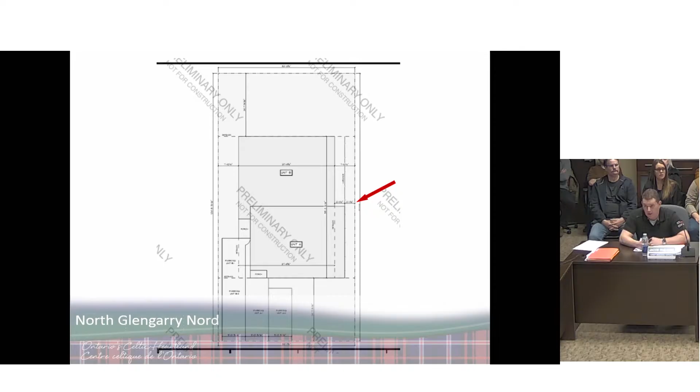So in this case, there's 3 parkings for 2 units, so it's compliant with both our current and our future dwelling unit future zoning bylaw that will be passed this year.

So that's the property. That's an image of the property. The phone pole that you have there is pretty much where the property line is. So the reduction for the setbacks is where that red arrow is again.

There's currently no buildings on the north side, so the property goes from Marlborough to Robert. I did get a phone call from the owner of that property, and I explained that even though we're asking for this reduction here to 1.2 meters, it would not affect her property either for planning or for building, in the sense that 1.2 meters is still not too close to the property line to affect another building on another property, like for fireproofing, siding, etc.

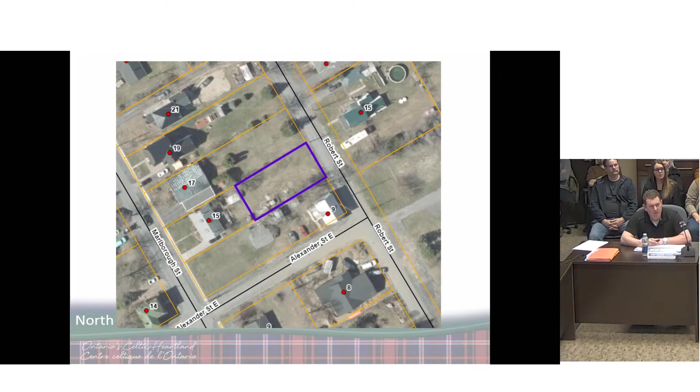It would also not affect her if she would decide to split the property in half to create a new lot on Robert Street—she could still do that even though this reduction exists here. So it doesn't affect her property as well. She was happy with the comments of the discussion.

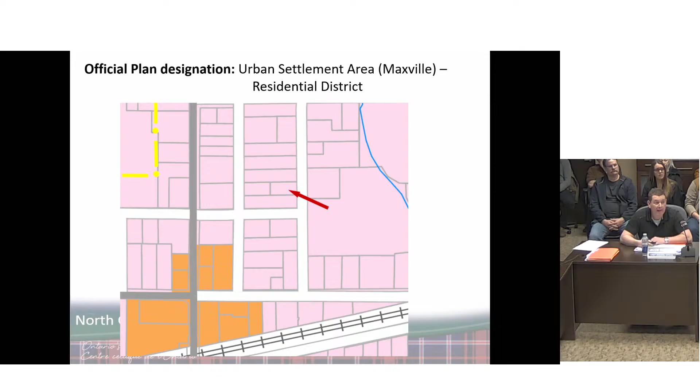So that's the picture of what it looks like now, currently vacant. That's my little map for the urban settlement area of Maxville. As you can see, it's pretty much surrounded by residential properties. Same thing for our zoning—north, west, and south you have residential properties, mostly single-family dwellings.

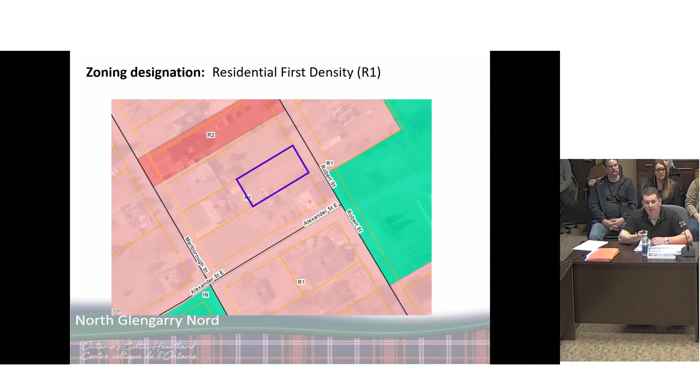Just in front, it's still in green there, so currently it's zoned R4. This is where you have the apartment complex, James Rowland, the old St. Bernard School, so it's pretty much right across from that.

So the setbacks, as I mentioned, one side has the required 2.4, so the owner kind of maximized the width of the building—he kept 8 feet on one side to be able to access the backyard, and on the north side there's that 1.2 meter instead of 2.4 that's required. So parking is compliant in this case.

If I keep going, for water and sewer—there is access to water and sewer on Robert Street, so this new building will be connected to municipal services. That's not a problem.

Stormwater, grading, green space—in this case, not a problem at all. There's enough space at the back for green space to divert the water, so that's not an issue.

There's one proposed driveway that will be wider than usual for the 3 parkings, to accommodate the 3 wide parking. And in this case, I explained why the 2 units are permitted—we do not have to do an actual zoning bylaw amendment to R2, even though it's R1. They're permitted to do the 2 units even though it's R1, but because of the way our zoning bylaw is written, we apply the R2 setbacks.

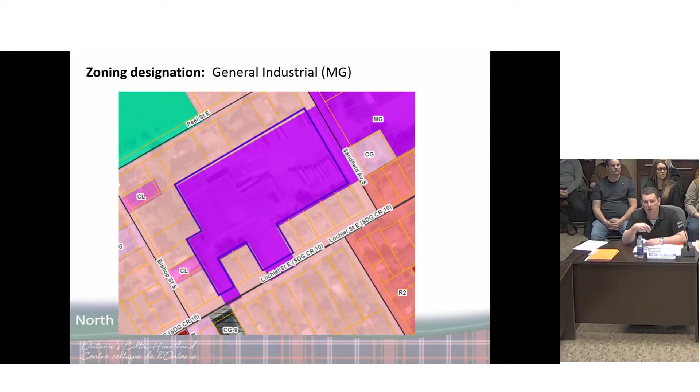Official plan designation: urban settlement area for Alexandria, employment district. So the proposed use or addition does fit with the official plan designation. General zoning designation is general industrial, so also compliant with the proposed use. Right now it's used as a warehouse shipping business, Minimax. That's to remain, so it's really just an addition for that existing use, fully compliant with our zone. On that picture there was no variance requested back in the day, but the lot coverage in this case is a little too much because of that big shelter. What we're proposing now is within the lot coverage of the general industrial requirement, so it's actually compliant with everything else aside from that setback.

So it's a new addition we're proposing, 56 meters by 28 meters, located on the east side of the existing building. I'll show some pictures, it will be easier to understand.

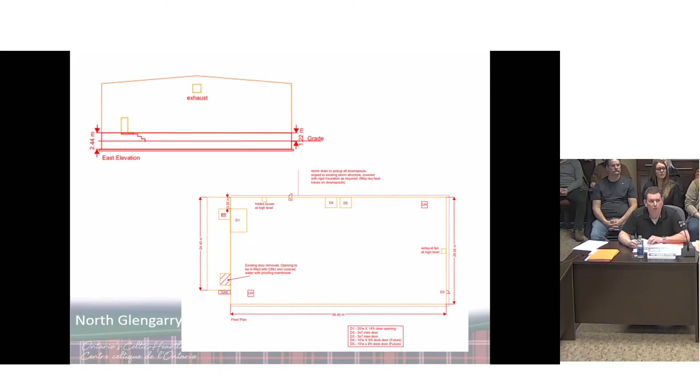Grading, swales, stormwater in this case all existing. We had that previous big building as it was, so all the water was collected on a private storm running pretty much across where those tractor trailers end. There's a few manholes there. This is all existing, we're going to use the same stormwater and grading system.

So we're still with our site plan control bylaw that we have. I'm still trying to see if we need one because it was existing. I'm discussing with Peter Young to see if we need a site plan in this case because everything was existing before, so we're really just reinstating what was there. Like most of the time, grading and stormwater are the biggest issues, and in this case it's all existing. So anyway, we'll evaluate what's being done at the planning stage, but that's what's proposed right now.

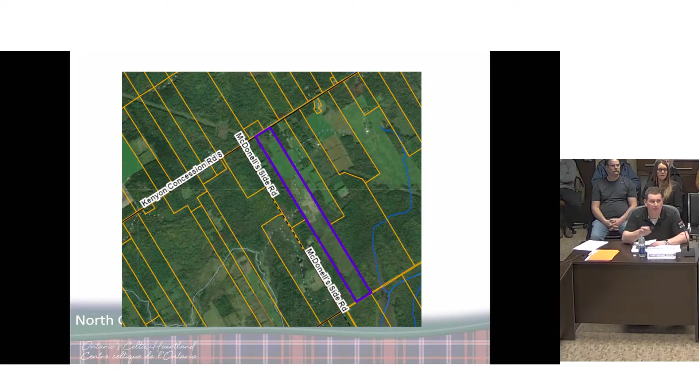Ferme LCM Kenel, the address 19442 Kenyon Concession Road 8. So that's where it is, pretty much between Dunvegan and Greenfield on Kenyon Concession Road 8, right there, a little closer up. Next door is the typical surplus dwelling - that's why you see a big farmland just east of McDonell's Side Road. The purple lot you see there is the agricultural land that is severed off from the residential lot we're severing off as the surplus dwelling.

So the owner is selling the house and keeping the land for farm use. The purpose of the application is to rezone the retained portion, the large 101 acre portion, from general agricultural to general ag special exception 275, to prohibit residential development and to acknowledge the deficiency lot frontage from the required 200 meters to the proposed 139 meters, and to rezone the severed portion, the residential lot.

That 1.5 acre severed portion goes from general ag to general ag special exception 276 to prohibit agricultural uses. This is just to comply with conditions from the consent application B68-25 that was already passed by the SDG Planning Committee, which required that we rezone those two portions. So that's the severed portion, that's the retained portion. Both have frontage on Kenyon Concession Road 8.

Official plan designation is agricultural resource lands and rural districts. Because the residential lot is located in the agricultural resource lands, we have to consider the entire property as ag. So we're changing the entire property zoning because the rural lands at the back don't have frontage on a public roadway at this point. Zoning designation is general agricultural, so our zoning bylaw is simply general ag all the way across.

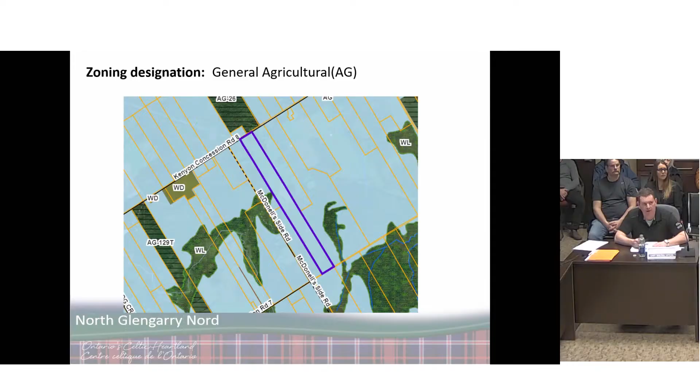I'll show it on the picture. There it is. As you can see, just on the east there's an entrance to access the agricultural lands at the back. No other entrances are being added. Just to note, there's our old landfill right there where the A is, not affecting the severance at all. If something would ever happen to the house, the setback from the landfill is far enough that it doesn't affect any development.

So it's really just a typical surplus dwelling severance. Very quickly, the Planning Act gives council the authority to pass such bylaws. Under the PPS and the SDG official plan, as long as the severed portion, the residential portion, is kept to a minimum acreage to accommodate the dwelling, septic system, and accessory uses, that's okay. In this case, 1.5 acres, a nice rectangular lot on the road, so it makes sense.

The septic system, we took into consideration where it is, on the south side of the building, and the well also, so all the setbacks are compliant. We did get the survey for that one, and there are no issues with the new property lines whatsoever.

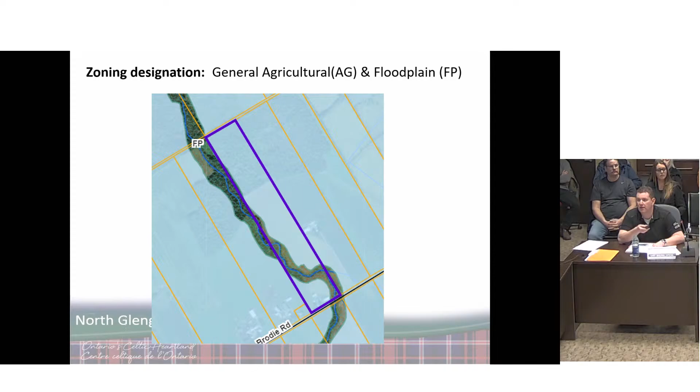For discussion: it's a 50-acre property, with 1 acre being cleared off for the residential land. Regarding frontage, both lots have frontage on Brodie Road — 110 meters for the agricultural portion, which is about half of the 200 meters required, but still permitted as a surplus dwelling. The residential lot, also on Brodie Road, has 75 meters, which is more than the 45 meters required and compliant with the zoning bylaw.

As shown on the map, there are 5 buildings on the property. Three are being kept with the residential lot: 1 dwelling and 2 accessory storage buildings. The septic system is located southwest of the dwelling, and the well will also stay on the residential portion. The 2 agricultural storage buildings will remain on the agricultural land, so no change of use is required here.

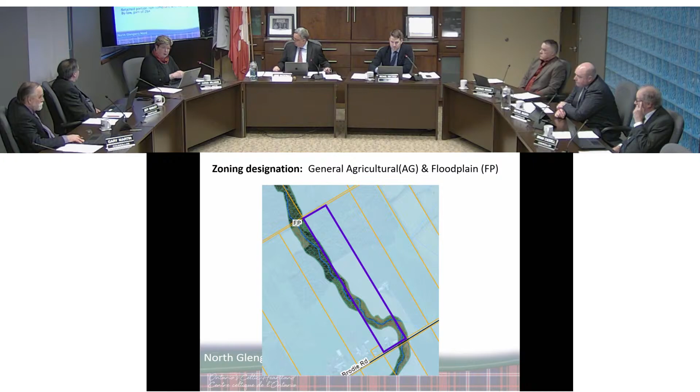Any other members of council? Go ahead, Deputy Mayor. Just with regards to the property that the house is on, it looks like it goes right up to the property line on the west, is that right? Is that the west? A little closer, to the other property, that one there? Yeah, okay, so it goes right to the west, right? Yes, to the west. Yeah, correct.

Okay, I'm just happy to see that, because how small could they have made it? Could they have insisted it be smaller? 1 acre would be the minimum. Oh, that's the minimum? Yeah, they need at least 1 acre to create a new lot.

And the new zoning bylaw is going to indicate 2 acres? Yes, I think we had that discussion before, and so this is, but in this case 1 acre is kind of the minimum, otherwise you would have to incorporate the other building. Yes, I understand. Anyways, in the new zoning bylaw, the minimum required in agricultural and rural will be a little bit more than 1 acre. Excellent, that's good news. Yes, that's very good news. Thank you.

Through you, Mr. Mayor, does anyone wish to speak in favor or against the application being presented? A second time, does anyone wish to speak in favor or against the application being presented? A third and final time, does anyone wish to speak in favor or against the application being presented? Okay, thank you. So there is no motion for this, so we will move on to Z03 2026, Ron Theoret.

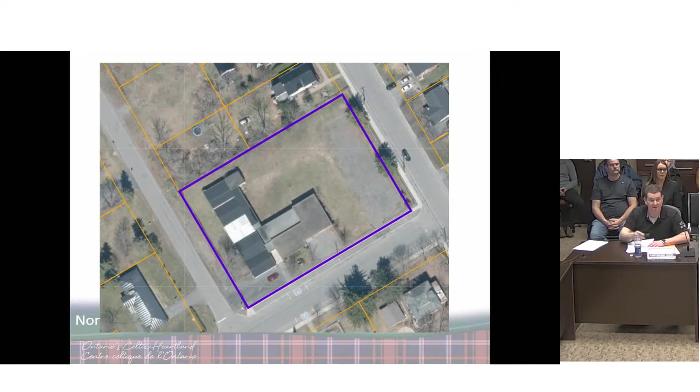Thank you, Mr. Mayor. So the owner for this file is Mr. Ron Théoret, location, the civic address known as 43 Kincardine Street East in Alexandria. That's the town of Alexandria, as you can see. And a little closer up, so this is what it used to be last year. It was previously a school, then a church. That building is currently all demolished, so it's currently a vacant lot. It goes from Bishop to Dominion, and the frontage, based on what we have, is Kincardine Street, so the street on the south.

So the main idea for this application is really to change it from institutional to residential fourth density. In this case, the owner went a little bit further - the lot, the design for the development is a little bit more completed, I guess. So that's why we have all these setbacks. At the end of the day, we're changing the zoning and asking for a reduction from that proposed new zoning. I'll explain it a little bit later, but at the end of the day, it's from institutional to residential R4. So that's the purpose of the application.

As you can see, there are many requirements. The first one is the main one: to rezone the property from institutional to residential fourth density, R4-9. The -9 in this case is because we are asking for all of the other reductions as well, so it's not just a generic R4, it's really to acknowledge all the deficiencies as well. So lot coverage from the max permitted 35 to the proposed 40.

The deficiency landscape area from minimum required 35 to the proposed 30. Acknowledge the exterior yard setback, east and west, from 9 meter to the proposed 2.8 meter. Acknowledge the front yard, which is actually south Kincardine Street, from required 9 to proposed 5.7. Acknowledge the rear yard deficiency from required 9 to proposed 4.4. And to acknowledge the deficiency in parking spaces from the 41 spaces to 31.

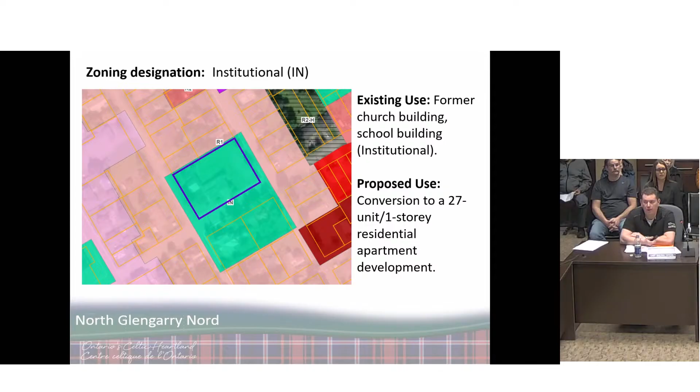So why say it's compatible? It's just because there are no sensitive lands anywhere. It's not like there's a commercial or industrial building around — it's residential use all around the property.

It's 0.96 acre, with no proposed change to the size. It's fully compliant with R4 zoning designation. As I mentioned, the owner is proposing to go with 1-story, slab on grade, 1-bedroom units.

Frontage is compliant with the zoning bylaw, as I explained on the map. It has frontage on 3 streets. The civic numbers for the one running across Kincardine will definitely be on Kincardine. The other one we'll have to work out with the SDG and our civic number bylaw, but there's lots of numbering room to play with.

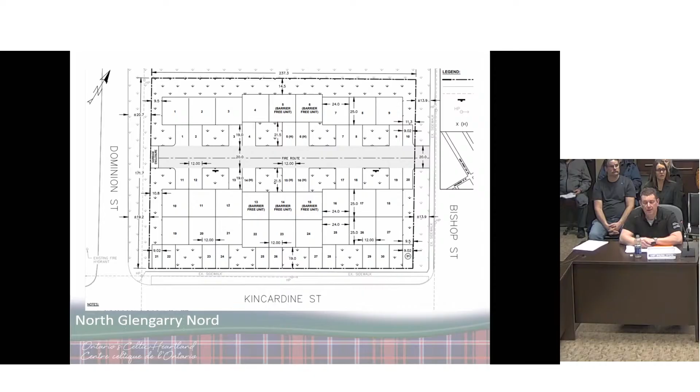This is the map I just explained — a quick sketch design the owner did. These are designs of what it could look like, similar to the ones we have on St. James Street right now. Same owner, built like townhomes but really apartment buildings. There's no garage, which is why each unit has its own parking in front of its own apartment.

This is a floor plan — I'll show it on the next slide. So that's what they look like, all one-bedroom units. Some have to be wheelchair accessible because of the number of apartments — 15% have to be accessible. They're pretty much the same, just the door sill, door width, and bathroom setup change to accommodate wheelchair accessibility.

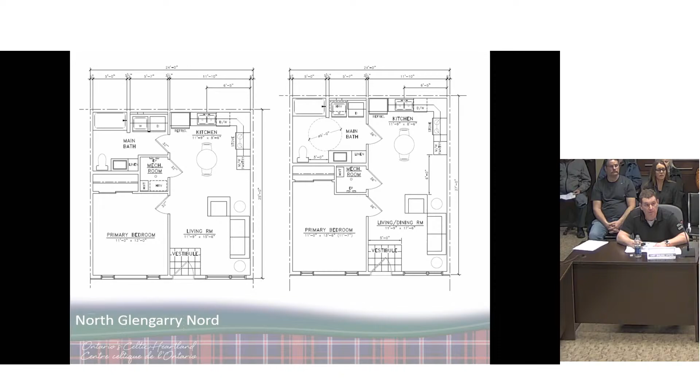Now for the setbacks — all the setbacks that are required, I'll jump to my next slide. It's hard to explain here, so I just put that there to show approximately where the building is currently proposed.

Right now, from the sidewalk, what's being proposed is approximately 25 feet from the sidewalk for the new building. I'm not talking about the property line, but the actual physical location of the sidewalk, which is on the road allowance — there's room between the sidewalk and the property line. The setbacks requested here are all measured from the property line.

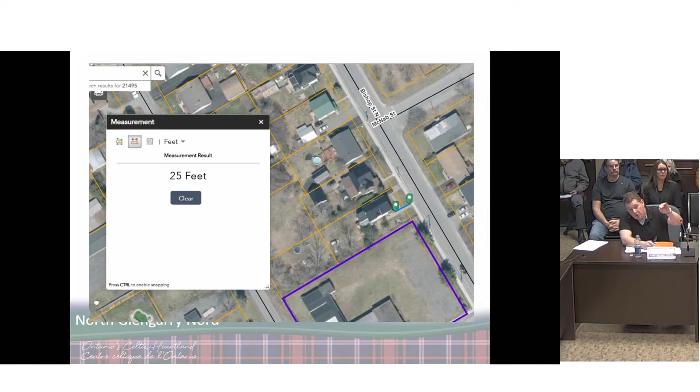What I tried to demonstrate is really just to show where the building would be located compared to other buildings around. The two green lines you see represent approximately 25 feet, where the proposed buildings would be. The owner is proposing to pretty much keep the existing building line along Bishop Street North for the 3 rows of apartment buildings — that space between the sidewalk and that house is approximately 25 feet. Mind you, it's approximate, not exact, just to demonstrate that the building would be aligned with the existing building line on Bishop Street North.

And then my next one here, same idea, but on Dominion Street North. Based on the dimension, the distance from the existing edge of the road, the edge of pavement, to the building, it's 31 feet. So that's what it looks like. As you can see, where the church or the school used to be, there was a little bit more than 31 feet. So the new proposed building would be closer to the road than the previous building was. That's where there's an existing retaining wall, about 2-3 feet.

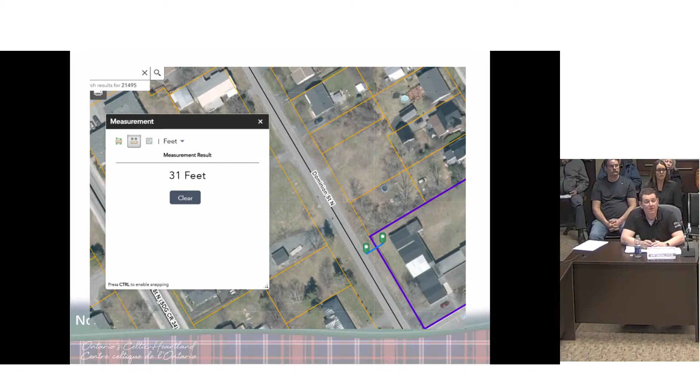It's going to be maintained. We're going to keep that retaining wall, but that's the distance the building is going to be from the actual pavement. And same idea from Kincardine Street.

As you can see, the edge of the wall would be approximately 24 feet from the sidewalk. Yes, so from the sidewalk, 24 feet. As you can see, the front section of the church was close to 24 feet. So the only difference is that the buildings are going to go right across the property, right? So that's where they will be. I just tried to demonstrate a little bit more what these setbacks represent on site. So that's for the setback.

And then lot coverage. I explained it a bit before. So we're really talking about the R4 property. Both lot coverage and landscaping area consider the fact that an R4 apartment complex building will usually be more than 1 story. It doesn't have to be, but that's why we have these reductions. They're not drastic, but they still exist, like from 35% to the proposed 40. So it's still, I guess, reasonable. And then from 35 to the proposed 30 for green space.

The entrance driveways, I explained them a little bit. So all of the apartments facing Kincardine will have their own entrance off Kincardine Street. All the other ones, their entrance will be provided via the fire lane.

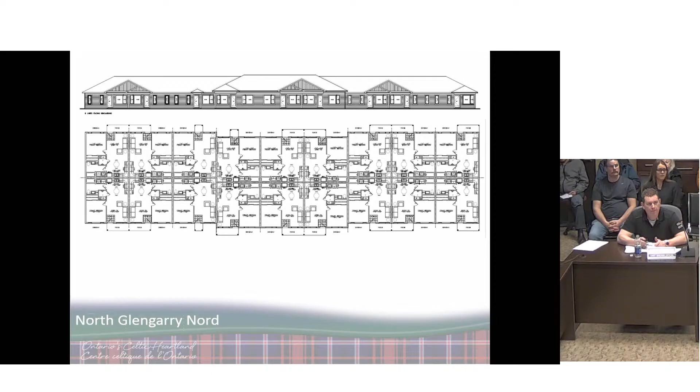I guess I'll go back to the site plan for parking. I just want to explain. The ones on the south each have their own driveway. There is some space to park cars along the street. I know the church uses it a lot for their parking. It's not going to be available anymore as much. I guess the church only uses it for a couple hours a week, so this is, I guess, less of an issue.

But I agree that some people in the county do have 2 cars. In this case, there's only 4 extra parking spots. So it will be up to the owner to ensure that parking is being respected, because I had a few discussions with some of you. The fire lane cannot be used for parking either because it's the fire lane. It needs to be clear all the time. It's an access for the fire trucks.

The owner proposed in this case to have double parking with some green space between the units, kind of like the typical setup you'd see in a crowded subdivision. There's a tree that will be planted in all of these green spaces, so 12 new trees would be planted. Of course, if we require more parking, it's possible along that fire lane. If we remove that green space, we can add more parking spaces, but removing green space raises that coverage percentage a little bit. So we're stuck, right? If we add more parking, we remove green space and trees. I just wanted to clarify that.

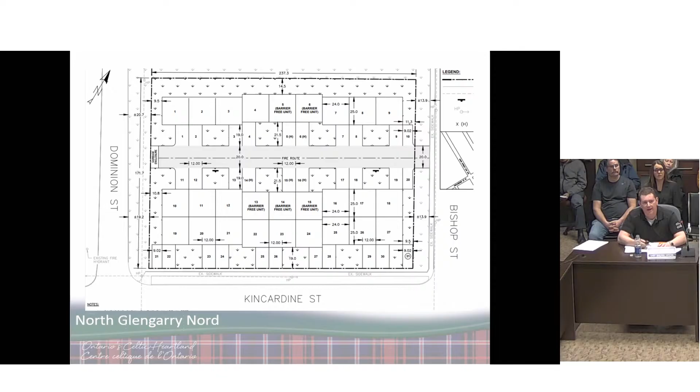There are 2 or 3 large trees currently along Bishop that will have to be removed for this development. One isn't directly in the way of the driveway, but once we dig for excavation it will most likely die, so both will be removed. To compensate, the owner is proposing to plant a tree in each of these 12 green spaces, giving the look of a typical subdivision, though the trees would start smaller and grow over time.

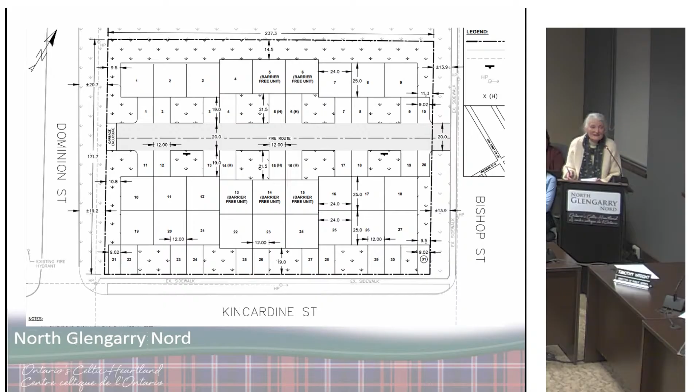Okay, thank you very much. And we had a hand up at the back. Yep, go ahead.

My name's John Fairchild. I live 4 houses to the north on Bishop.

I have just a few remarks, and with respect to the 2 previous speakers, I believe the technical issues—tell me if I'm wrong—should be dealt with in the next stages, correct? Snow, garbage? Yes, those technical issues will be dealt with.

I want to make some general remarks. We all know that Canada has a critical shortage of smaller and lower cost housing, and Mark Carney has just set as a critical goal for Canada that we fix this problem as soon as possible. So this is exactly what Ron Terra proposes to work toward in Alexandria, and to do it right now, not in 5 or 6 years. The Conservatives are complaining about things being way down the road. Here we go, you know.

The few minor adjustments he needs are, I think, relatively harmless, and there are some technical issues that are real, and you're going to have to deal with them, okay? I'm a former builder myself, by the way. I'm a former infill builder in Ottawa.

Canada needs hundreds of projects just like this. Right now, we need hundreds of them to get up to 1 million new, smaller, lower cost houses. So if not us now, then who, when, and where?

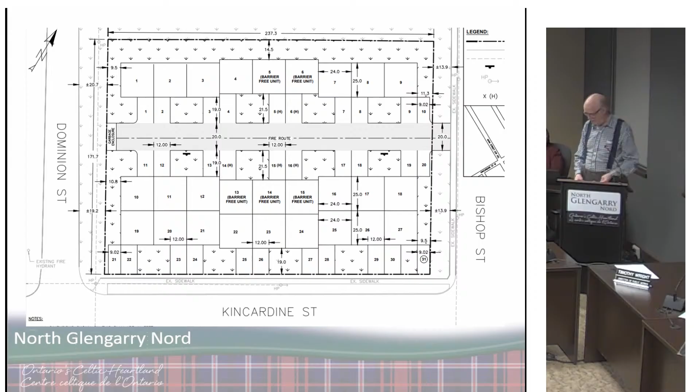Thank you. There are others, go ahead, come on up. If you don't mind, I'd like to remain seated because I'm someone with illness. Sure, okay, thank you.

I'd just like to say that I am one of Ron and Nadine's tenants. We downsized for pre-retirement a few years back. I just want to mention that I think Ron and Nadine are doing only good for the town. They are fair landlords. They had the right to raise our rent incredible amounts over the past 5 years, and they did not. They raised us a minimal amount every year. So I think they're commendable for what they're trying to do for the people that are in need.

I don't think the few things that need to be rectified or dealt with will be a problem. I'm sure Ron and Nadine are professional enough and respectful enough of the town and your laws that they will be dealing with them honestly. They're planning to plant more trees to resolve the green space issue. Alexandria's a small town with about 2,900 people, maybe 3,000. We have a huge park in town. We have beautiful green spaces, walking trails. So he's maintaining the properties he already has in good faith. So why not allow him to—like the gentleman said, there is an extreme shortage of housing for people in need. I think his propositions are fair.

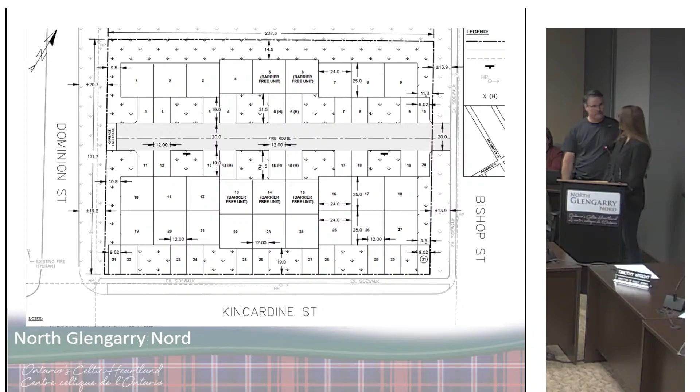Did you like to add something? No, that's good. Thank you. Okay, thank you very much.

And that gentleman back. Hi, my name is Jean-Marc Michaud. I live at 33 St. George Street East. And like my neighbors, I don't oppose the construction, me and my partner. It's just the amount that is proposed. It's just trying to put as much people there as possible. And I know the plan makes sense and everything, but it's just the amount of people that are going to be living there, especially with the traffic that's already busy.

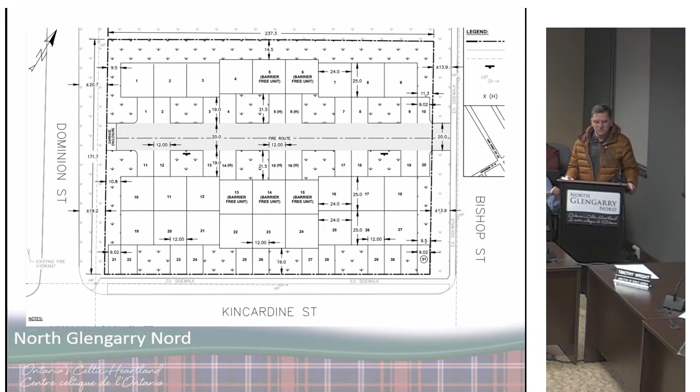And I sent an email to Jacob. And what about property value that is to be considered? I know it's mentioned that it's 55 and plus, but I'm 60, semi-retired, and I still have two cars at home. So there's lots of things to be considered, especially that it's going to be close to the sidewalks and lots of people for the amount of space. Thank you.

Would anybody further like to, yes? Sorry, I meant to add something. I'm on sick leave right now, but I am an ODSP employee. I work with people with disabilities and that are on pension.

I hear from my clients every day, crying, calling me. I'm on the street, I have nowhere to go. Landlords are gouging them, renting rooms in a house that they bought out from a residential person. Renting individual rooms in a home at $900, $1,000, $1,200 a month. One room, not an apartment. My clients are crying every day for more housing. I think this should be taken into consideration. I don't think that it's overcrowding. I think we need more housing.

Okay, thank you. Yes, go ahead, sir. And I can vouch for that because I work at the post office and I see that every day, where people come in and they're renting rooms from landlords that are living in Montreal, in Ottawa, renting rooms $900 and $1,200 a month. That's wrong. That's just dead wrong. And I see them every day. I have the leases, and I'm wondering how are these people renting. Is the township aware of what's going on?

Renting rooms without, because I have to open up a box for these people. And to be able to open up a box, the permanent address, let's say 58 Dominion, whatever, has 4 bedrooms in there. And these people that come to open up a box, they can't open it up because it's 58 Dominion, not 58A, not 58B, not 58C or D. So now I get a lease, the person comes back with, well, this is 58A. Okay, does it really exist? Or are we just creating things like that? What she's saying is true, I see it every day. So we do need places to live.

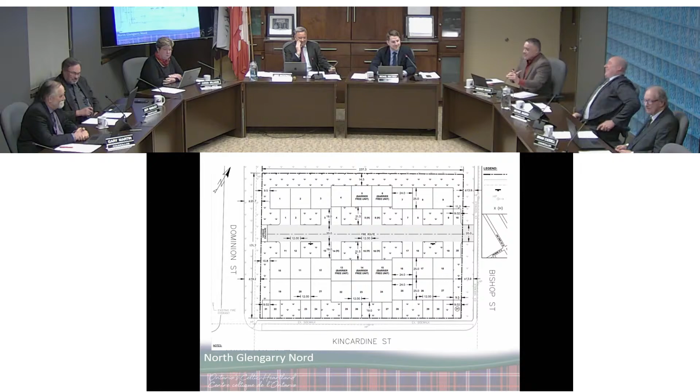Yeah, anyway, but I do hear the people that are saying that it's going to be a little bit too crowded. I've lived through in this town, and I can't picture a lot that size having that many houses too tight. It's going to be too full.

Like it doesn't... I do appreciate the fact that they're one room, they'll be affordable, all of that. It's just that I think if you'd come back to it, maybe a couple of duplex in the middle or something, and then try to shorten or minimize the impact of overall.

It's just that it seemed like to me it's too much of a visual thing. And then, yeah, the new bylaw from the province is 1 car per apartment. We don't, like Jacob said, we don't live in Toronto, and yes, it's the new guidelines, but we don't have to go by them. Like we don't have to. I don't think we are obliged to go down to one.

And like I see on Kincardine Street there, and I do - Colleen's saying the bus runs down there, and there's snow and the people on the sidewalk. And then in the fire lane also, I can see people parking in front of the houses temporarily, and then something will happen. That garbage bin over there is far for the people that are in Kincardine, and they're gonna walk on the lawn on the other side.

If you could just, when you come back - I'm not against the zoning bylaw, because this is what we're looking at tonight, just a 2R4, institutional to R4. It's just that it covers too much. Like we did the one with Minimax, and it's a big building, and yet there's room to breathe around it. This one is too packed.

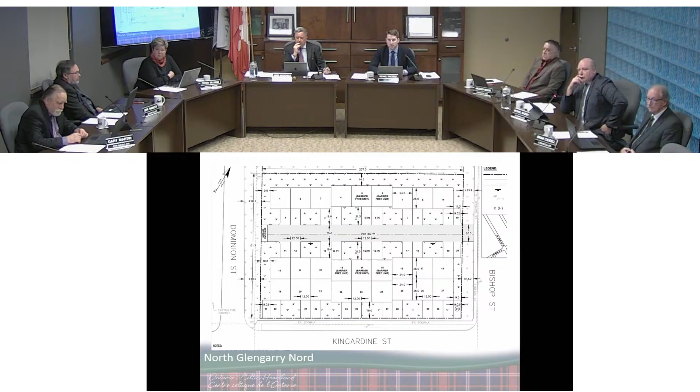It just, in some ways, is good on one side, but it has some limitations because of that. So if it fits with what is generally done in most rural areas in terms of intensification, then I think we can accept that, but I would like comparisons done to see whether this is really practical. And I think you've shown so well with your units how nicely they're laid out, that there's no - the taste is impeccable, and how things are done. It's just a volume that we're grappling with, trying to figure out how we go from properties.

And they don't all show all the way down, but if you take the same amount of land in the surrounding houses and you count up the number of people living around, there are maybe 6, 7, maybe 8 people in the same square footage that you're putting - could be as many as well over 50 people if there are couples living in the building. So we're looking at a dramatic intensification, and again, it's just a matter of refining it.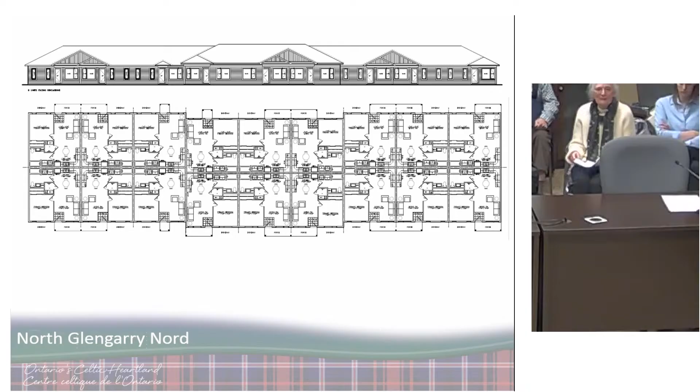This will be a test for everything that's going on - in other words, it becomes an example. So it needs to be done thoroughly and effectively for both the tenants and for the town and for those that are surrounding it. So this is sort of the - I'll be quiet now. But I'll just make a quick comment on one of the things you mentioned, that we don't have a lot of land in Alexandria to build on.

Aside from the development, we're still unsure what's happening behind the arena. We have the one being built on McDougall Street, and if you go through the rest of the lands, we have some at the south end of town owned by a family that's lived there a long time. We have the big old snow dump in the middle of town, but other than that, very few building lots in Alexandria. So I get what you're saying, but really there are not a lot more places to build on.

So at this time, go ahead, Councilor. Thank you, Mr. Mayor. Just a quick comment. Someone had mentioned about property values going down. I don't see that. I see property values going up in that area because of this. Okay, thank you.

Can I just? Yeah, okay, last one, we gotta move. To go back, really, we're talking here about setbacks. That's what this is. We're going to R4, which is the change, and setbacks, which is the other change. Some coverage, the 5% issues are, I'm gonna say, minimal in the grand scheme of the whole plan.

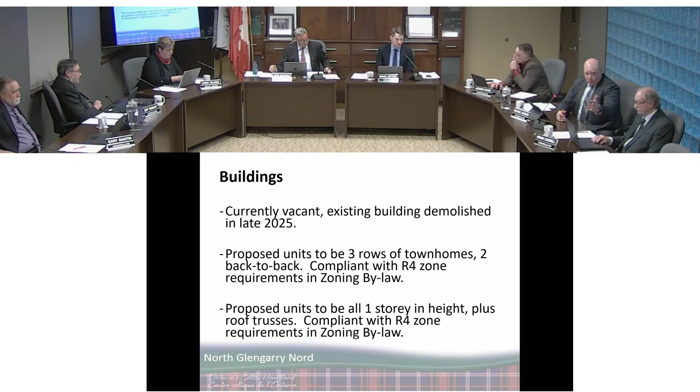When you look at the setbacks that are proposed, and we can use either Bishop or Dominion, or really Kincardine, they're all about the same in terms of 19 feet. Jacob's illustration shows 25 feet on Bishop. When you consider, if you go for a walk down Dominion, going south towards St. George, at the corner of St. George, the setback is about 5 feet on that house at the corner. Give or take, yeah?

So if we're talking about how close it is, that's a 2-story house, that's a big house. These are 1-stories. And the point about the setbacks in an R4 zone is that they are so significant because they account for height. So when we bring that height down and we go out a little bit, it has the net effect of the same thing in terms of shadowing and infringement on neighboring properties. That's really what the setbacks are about. So I wanted that to just be food for thought.

Everybody said they're in support of it in principle. The biggest issue for those who are against is density. And I'm going to say a conversation with everybody and reasoning and final decisions about layout.

If we vote yes on this right now—we aren't voting, sorry, yes, we're not voting. So, thank you. When it does come for us to vote, what we would vote on is the setbacks. It's not the layout, it's not the aesthetic, it is purely where the envelope of the buildings could go to. The site plan control addresses landscaping, garbage, finishes of the building even potentially. That's all site plan control, so a different beast in itself. Just so everybody's clear on that one, and we don't have a vote.

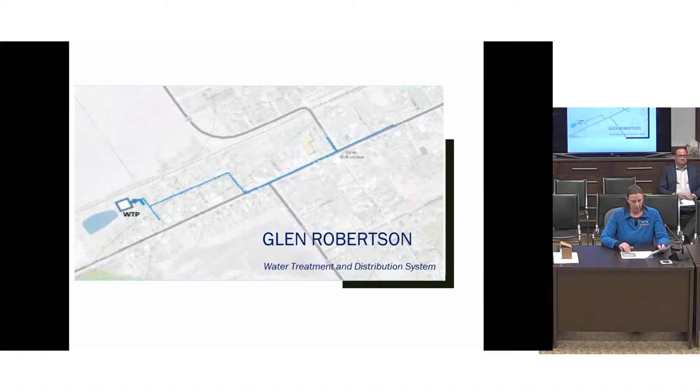So Glen Robertson, for anyone who doesn't know, this is kind of a quick overview of where the water plant is and where the water pipes run. It's only partially servicing the village, or the hamlet of Glen Robertson.

It is a small municipal residential drinking water system, reclassified last year to a Class 1 treatment and a Class 1 distribution. It services approximately 50 homes and is designated as a GUDI well, meaning groundwater under the direct influence of surface water. We use chlorination and UV as the primary treatment. We have no water storage in this area, and we currently have noted there's limited growth in the area.

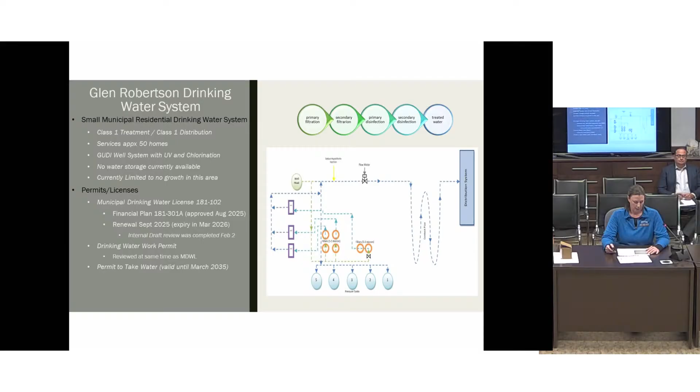In regards to permits, we are up to date with our municipal drinking water license. We are currently in the renewal process and expect to have our new license in March 2026. I have already gone through and approved the draft that was submitted in February. Our drinking water permit will also be reviewed at the same time as the municipal drinking water license, and our permit to take water is valid until 2035.

When it comes to the flow summary, the water usage was similar to the previous years. There's been no change, no growth to note. We haven't noticed any shortfalls from the well production. We did start monitoring the well levels in September due to the low water issues raised by the RRCA. Our daily allowable production from this well is 224 cubic meters per day. We had a maximum flow of 40.6 cubic meters and an average flow of 24.2, which puts our current system capacity at 10%.

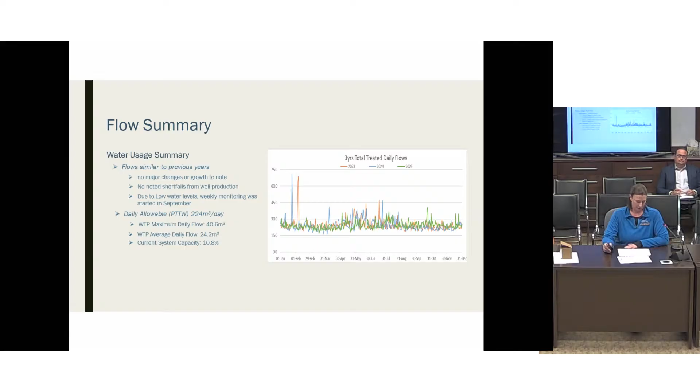When it comes to monitoring and sampling the water, we have operational monitoring, which is just our daily routines where we monitor the quality. We haven't noticed any changes in the raw, treated, or distribution water. For sampling, we have routine sampling, which is completed weekly, and our levels are well below anything required. Our quarterly sampling is done once every 3 months for nitrate, nitrite, THM, and HAAs, and we are also well below any of the limits required.

For additional sampling, we have inorganic and organic sampling required once every 5 years; our next sampling round is 2027. For lead, we have biannual monitoring every 6 months and then a 3-year sampling cycle, so the next sampling cycle will be in 2026. For sodium and fluoride, it's every 5 years, and once again that sampling cycle will be in 2027. The only upcoming changes to note are the new permits. Although we do have new permits coming in, there shouldn't be very many changes to the actual system or the requirements.

When it comes to expenses, this is a fairly small system. We had no significant expenses noted in 2025. We had some operational issues with our UV units and chlorine pumps, the majority of which were determined to be caused by maintenance, and once identified, they were repaired. We had some minor issues of high flows, mostly due to internal plumbing leaking or damage. And as discussed, well level monitoring is just now trying to establish a baseline for Glen Robertson. For our annual programs, we had spring flushing, done in 1 day, valve turning, done in 2 days, and no construction throughout the 2025 season.

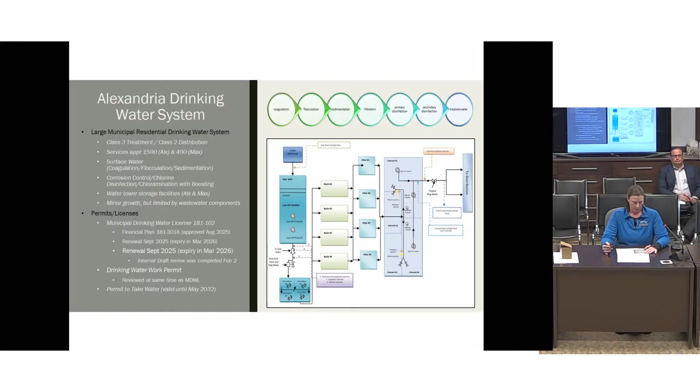As part of that renewal process, the Drinking Water Works permit will also be reviewed, and our permit to take water is valid until May 2032.

So for our flow summary in Alexandria, it's a little bit different than Glen Robertson. We have an allowable amount that we're able to take out of the mill pond, and then we have an allowable amount that our process can actually treat. So our raw water intake is 5,616 cubic meters, whereas we can actually treat up to 8,014 cubic meters per day. So we are kind of throttled by that amount that we're allowed to take in.

Our maximum flow that we took into the water treatment plant was 3,252 cubic meters, with an average flow of 2,188 cubic meters, which puts us at 39% capacity on the raw water side. When we look at the treated water side, our maximum flow rate was 2,983 cubic meters, with an average rate of 1,983, which puts the system at approximately 24.7% of the rated capacity, an increase from 3.4 from the previous year.

Thank you, Mr. Is that including Maxville? Yes. So that's what we take in, it includes everything. Yep, the flows take in both Alexandria and Maxville.

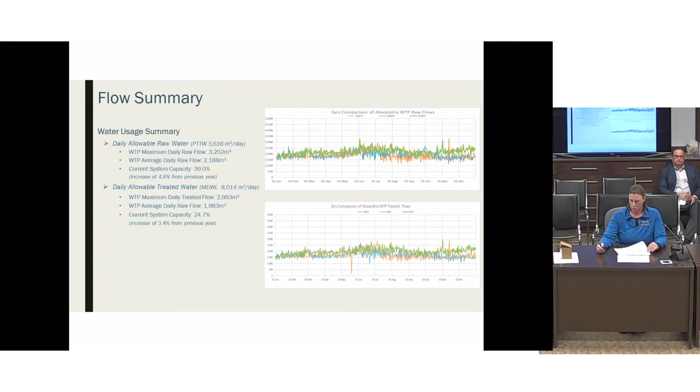There were no adverse samples noted during the quarterlies and the annual sampling requirements because it's large municipal. The organic and inorganics are required once a year, so there were no issues in 2025. The lead program is the same as Glen Robertson, so we will be sampling in 2026. Our monitoring hasn't shown any great fluctuations. Sodium and fluoride, once again, are only due every 5 years, so the next sampling would be 2027. The only changes to the system to be noted are the new drinking water license and drinking water permit.

When it comes to significant expenses in Glen Robertson, we had one of our variable frequency drives fail, so we had the replacement done. It was ordered and the parts were received in 2025, but it was actually installed in 2026. We also have our SCADA system upgrade, which is the main computer system that runs a lot of the programs and processes within the treatment. We planned to upgrade it in 2025, and we're still waiting for the deliverables at this point.

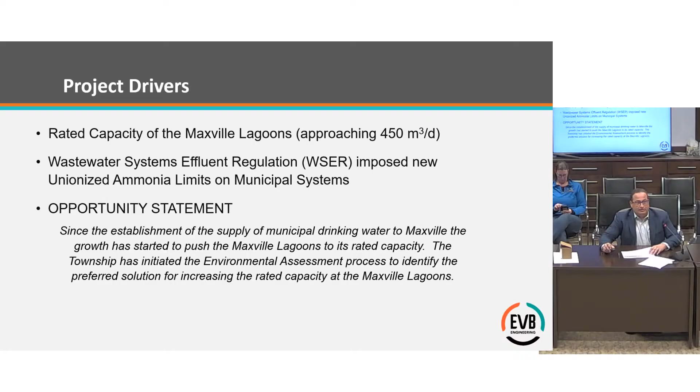Since the establishment of the supply of municipal drinking water to Maxville, growth has started to push the Maxville Lagoons to its rated capacity. The township has initiated the environmental assessment process to identify the preferred solution for increasing the rated capacity at the Maxville Lagoons. We'll be taking this opportunity statement to the public for their feedback into the process.

The Environmental Assessment Act here in the province of Ontario requires all municipal water, wastewater, and transit projects of various sizes to go through the environmental assessment process. This is governed by the Municipal Engineers Association through their documentation. The EA for Maxville is going to be a Schedule C EA, which requires public consultation at two points. We'll be doing that very soon - it's already been advertised on your Facebook page, and we'll be doing it again later this year in May. We'll also be circulating all this information to different review agencies, either First Nation groups or federal and provincial bodies, to give them the opportunity to feed back into the process as well.

The Maxville wastewater collection system is summarized in this figure in front of you. There are two sewage pumping stations, identified as two green blocks. One is at the top of Main Street, and one is at the west end of the community, which services Maxville Manor. Because we are looking at increasing the rated capacity of the overall system, the pump capacity for the main pumping station, which conveys everything up to the Maxville Lagoons, will also need to be expanded so that we can match the rated capacity of the lagoons.

The lagoons in Maxville were built in the late 1980s. They're a facultative two-cell lagoon system. They collect all the wastewater all year round, and then every spring it is discharged into the receiving stream, where your operations group monitors the effluent quality to make sure that there's compliance with their environmental compliance approval.

The United Counties of SDG is working with its member municipalities to prepare a growth management strategy for the area. It has identified for Maxville an increase in the number of dwellings from 321 dwellings in 2021 to 561 dwellings in 2051, and ultimately 858 dwellings within the urban settlement boundaries of Maxville.

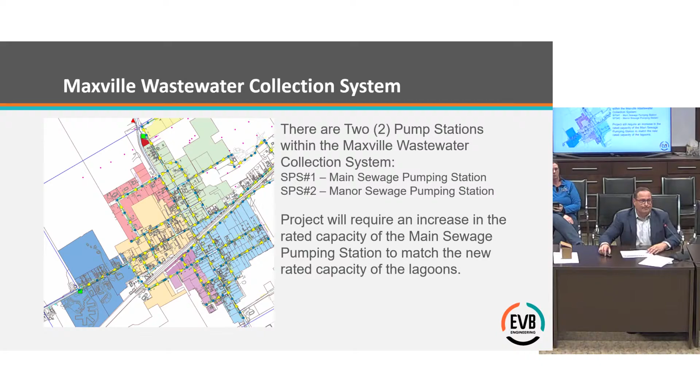Excuse me, Marco - if I may? Yeah, go ahead. That's only if all of that residential land gets developed? Through you, Mr. Mayor, that is correct, yeah. So that's all the subdivisions within the municipal settlement boundary - there's the large parcel of land on the northwest as well as the southeast. Yeah, okay, that would, yeah. That's a lot of land to develop, right? Yeah. It more than doubles the population. Right. Okay.

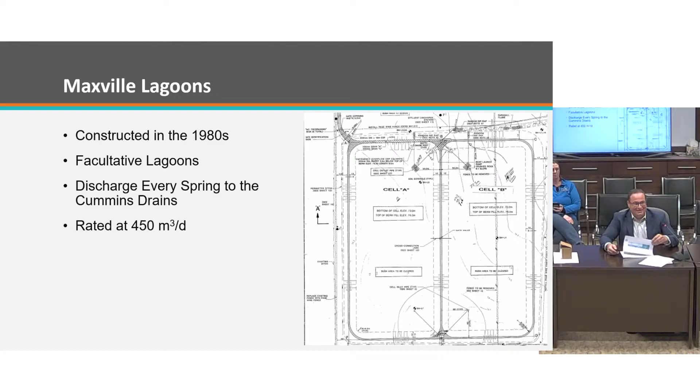So we did go to the Ministry of the Environment, Conservation and Parks to talk about what the potential effluent limits could be if we were to increase the capacity. The approach we took was, instead of building a lot of infrastructure, what if we were to introduce a fall discharge? A lot of lagoons in Ontario discharge all the wastewater collected over the winter and spring, then collect it during the summer and discharge that in the fall. That way we're ultimately doubling the capacity of the lagoons. So we prepared an assimilative capacity study which looks at the ability of the Cummins Drain to accommodate the additional flow in the fall without having any negative impacts on the environment. Through this consultation with the ministry, we have developed these effluent limits, which we believe we can design a facility to treat for.

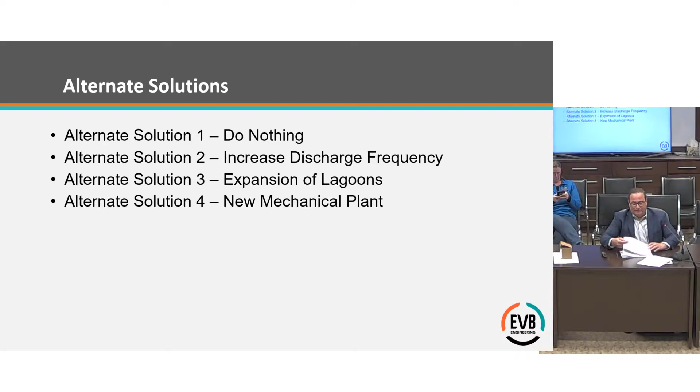We've developed four different alternatives for you to consider, and again, I will be taking this to the public for their consultation and input into the process. The first alternate solution, and this is always an option, is to do nothing. The option of doing nothing means the ability for Maxville to continue to grow will be limited by the treatment capacity at the existing lagoons. We will also continue to have risks of ammonia exceedances that are now a requirement to monitor as part of the wastewater system's effluent regulation. So moving forward, we do not recommend this alternate solution because it does not address either one of the driving purposes of undertaking this study.

Alternate solution number 2 is to increase the discharge frequency. Although it doesn't necessarily double the capacity, because we need to account for the accumulation of additional sludge within the volume of the lagoons, this provides an option to increase the capacity beyond the design window of 2051, up to about 800 cubic meters per day. It does include servicing a lot of those lands we were previously discussing, and it avoids any expansion of the existing berms.

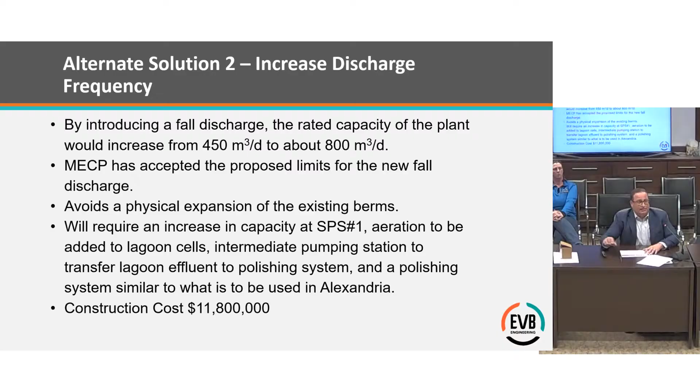What we would do is the existing lagoons would hold the wastewater, and then we would have a polishing cell afterwards to remove any constituents before it gets discharged into the natural environment, very similar to what you're doing in Alexandria right now. The cost of this option is about $11.8 million.

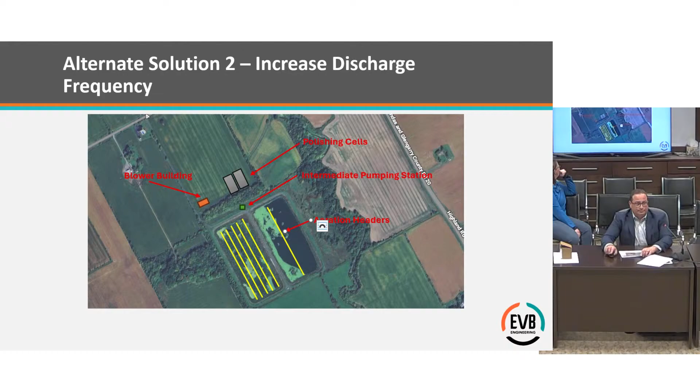The third alternate solution would be to expand the lagoons so that we can treat the ultimate design capacity of 950 cubic meters per day. This would require an increase in the volume of your lagoon cells by about 33% and would cost approximately $14.7 million. That would look like this alternate solution.

The fourth solution would be to totally abandon the lagoons and put a mechanical plant in its place. Again, if we were to look at a location, there is the property north of the existing lagoons. It does encroach closer to the residential properties that are on the street, so odors and noises could have impact on off-site properties, and this option does not utilize any existing infrastructure on that site. So the cost gets driven higher, to about $16 million.

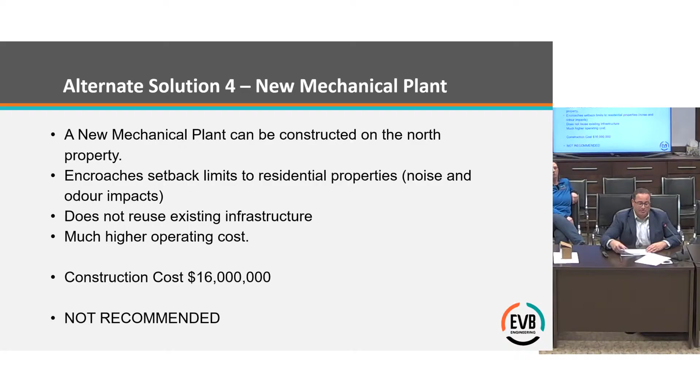The next steps are to take this information to the public on March 3rd. I believe we've got the community hall reserved in Maxville for this event. We'll allow them an opportunity to provide some input into the process, after which we will be looking for a recommendation. Depending on what rated capacity the township wants to target and what debt carrying capacity the township will allow, we'll look at alternate 2 or alternate 3, decide which one best fits your needs, and then take that into stage 3 of the EA process, which looks at alternative designs.

We could look at the same system that Alexandria is currently tendering for the polishing of its lagoon effluent. There's also another technology called the Lagoon Guard, which has other advantages and disadvantages. We'll present to you those 2 alternate solutions so that you can have a full understanding of the technologies available to provide you with an ultimate solution.

That information would all get summarized into a stage 3 document with updated construction cost estimates, which we would then bring back to council prior to going to the public on May 26th, which is a tentative date. Once we have confirmed what the preferred solution is, we would document that into an environmental study report, which we would then put on file for 30 days, after which, once approved, the township can then take the preferred alternate solution to design and construction.

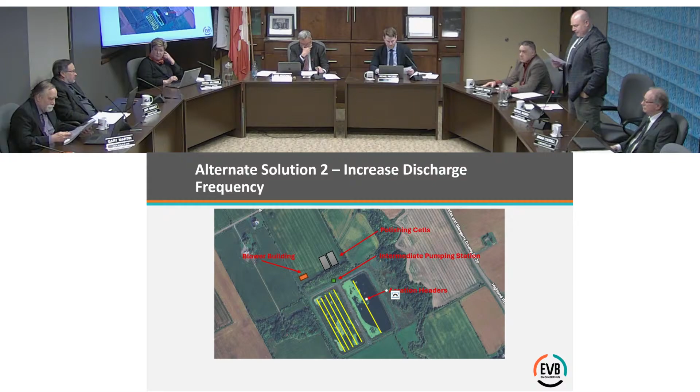Whereas the Township of North Glengarry acknowledges that municipal infrastructure, including roads, bridges, and water and wastewater systems, underpins public safety, economic vitality, and quality of life in Ontario's rural and small urban communities.

And whereas the Ontario Community Infrastructure Fund, OCIF, was created in 2015 to assist small and rural municipalities facing infrastructure deficits that exceed their local revenue capacities.

And whereas in 2022, the Government of Ontario committed to increase the annual OCIF envelope from $200 million to $400 million over a 5-year term, with that commitment scheduled to expire at the end of fiscal 2026.

And whereas fixed funding levels amid rising labor, materials, and climate resilience costs have eroded the purchasing power of the $400 million envelope, jeopardizing municipalities' ability to deliver and sustain essential services without incurring unsustainable debt.

And whereas predictable multi-year funding indexed to real-world cost drivers is critical for municipalities to develop, finance, and execute long-term asset management plans, reduce emergency repairs, and leverage complementary federal and private infrastructure financing.

And whereas the Township of North Glengarry requires a steadfast provincial partner to extend and enhance OCIF beyond 2026, ensuring infrastructure resilience, fiscal sustainability, and equitable access for all small and rural municipalities.

Now, therefore, be it resolved that the Township of North Glengarry calls upon the Government of Ontario to extend the annual OCIF envelope at not less than $400 million beyond its current 5-year term ending in 2026, with no reductions in subsequent provincial budgets.